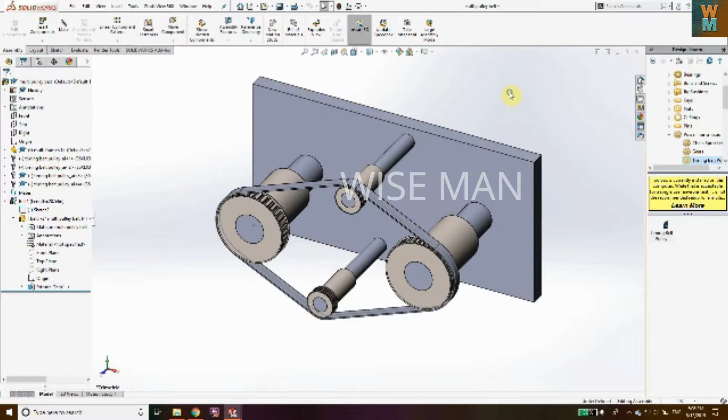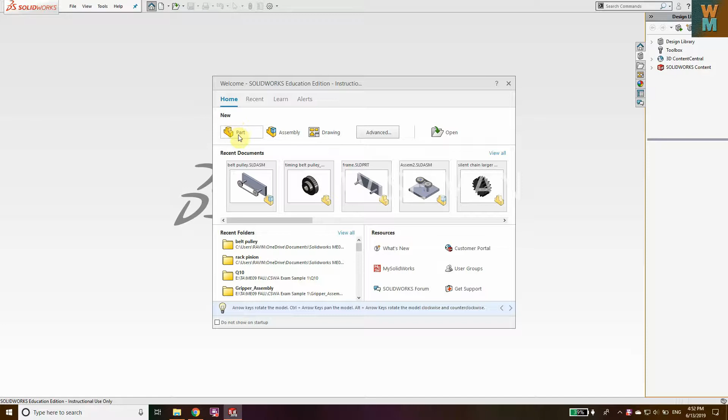So in this tutorial of Solidworks, we are going to see how you can make multiple pulley systems. So let's start. First of all, we need to make the frame on which we are going to add the pulley and the belt. So let's start by clicking part to make the part file for this.

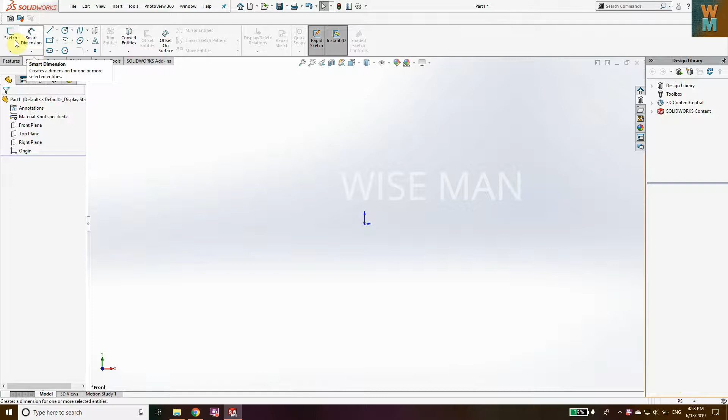So we are going to make a frame. Go to sketch and select the front plane, change the units to inch pound second IPS. Now go to sketch, select the front plane and make the frame. Go to smart dimension, give the dimension.

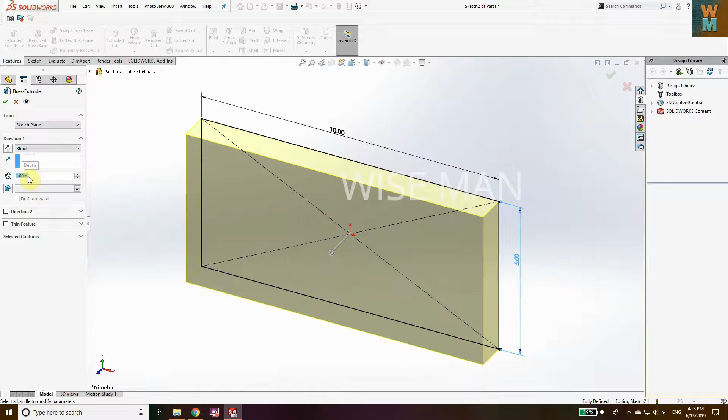So let's say this is 10 units and this is 5 units. So the dimension has been given. Go to features, extrude this, give 1 unit, or let's say 0.5.

Okay, so now click on this front face, right click this. If I right click, I will get all these options. Go to normal view and then again right click this and go to edit feature. Now sorry, go to sketch, so right click this and go to sketch. So I will show you again. So select this face, right click this and click on sketch.

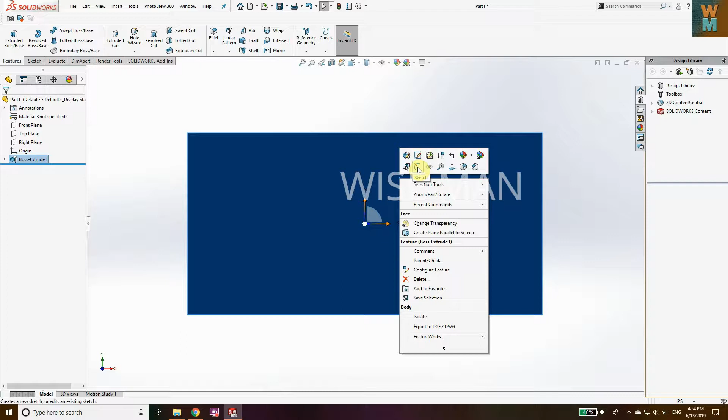So now select this circle and let's make one circle over here, one over here, then one like this. And now give the dimension.

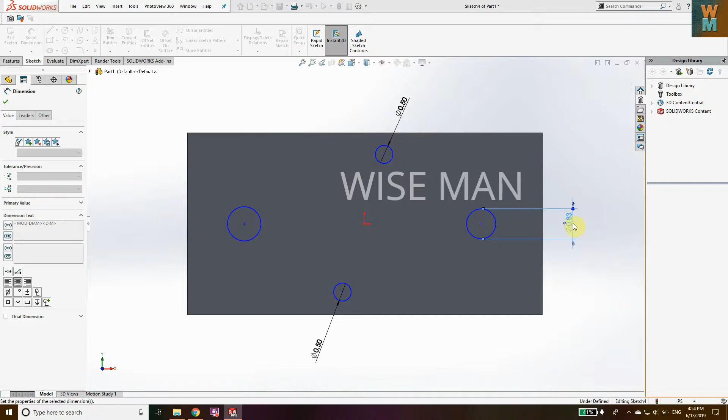So let's say this has the diameter of 0.5, this has diameter of 0.5, this has diameter of 1, this has diameter of 1. That's the diameter. Now give the distances from the origin.

So let's say this is 0.5, and from this to this it's 0.5. Same for this, from center to center distance is 0.5 units, from this to the bottom edge 0.5.

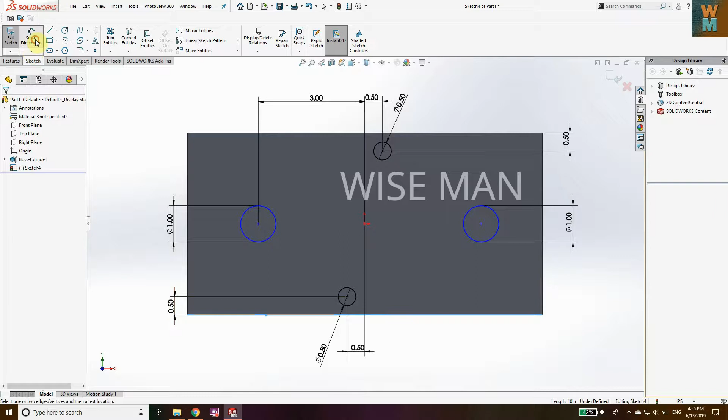And now for the bigger circle, select the center of that circle and the origin and give the distance of 3 units from the center. Then select the center of the circle and this, click on the smart dimension, this and this, give 2.5. Same for this circle, let's make it 4, and from this to this 2.5.

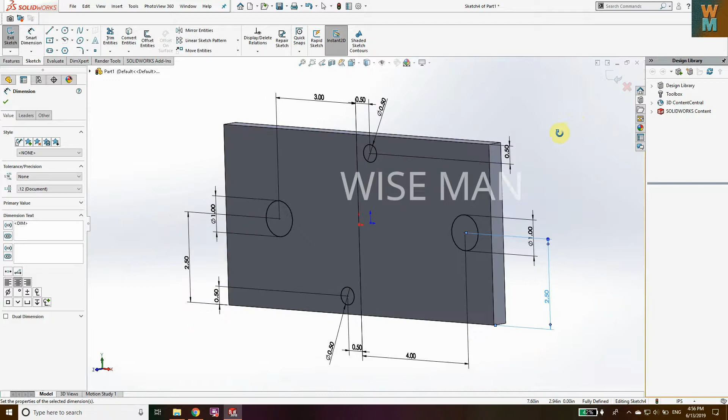So now we have defined the dimensions for all this. I think let's make it 3 for the symmetry thing. Okay, so now this has been defined.

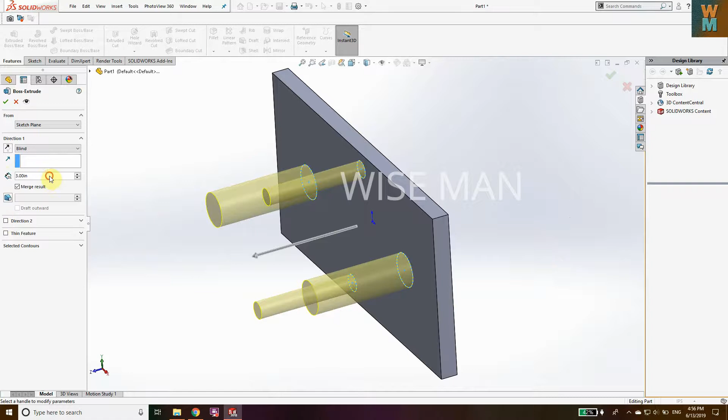Now go to extrude base, so it's able to extrude all these circles, and let's say we are extruding these 3 units. Yeah, or let's make it 4. Okay, so now you can see that we have this frame on which we are going to put the pulley.

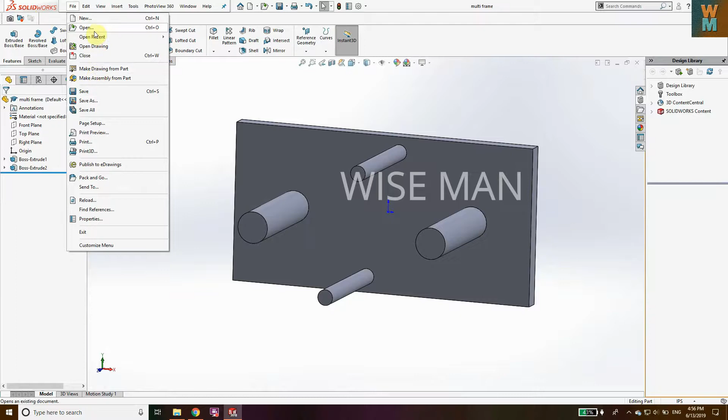Okay, so now save this, and let's save this as multi frame. And now go to file, go to new, assembly, and you select this and just click this tick right button. Okay, so now we have this frame.

And now we need to add the pulley and the belt. So go to this design library, go to toolbox, click on add in now because it's not added.

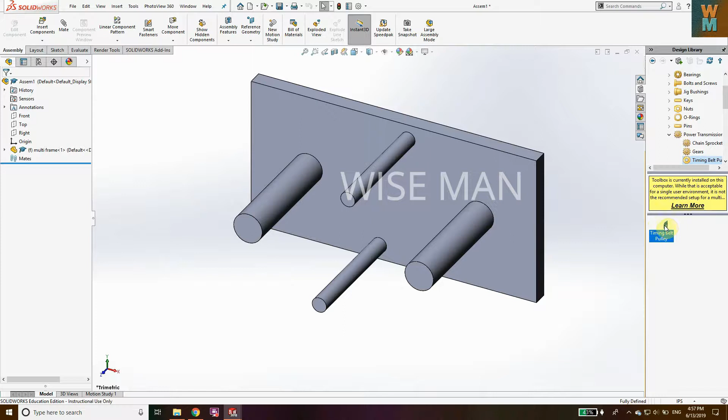Okay, so now first of all change the unit to inch pound second IPS, then here go to ANSI Inch, then go to power transmission, go to timing belt pulleys, select this, hold this and drag it over here. So that's the one, it's extra large.

Okay, change the properties from here. So extra large, belt width, flange, number of grooves 20, hub diameter is 1, so this has diameter 1, overall length 2. Okay, nominal shaft diameter is 1.

Okay, click on this, so again I got this error. For this, what you have to do: right click on this, go to the toolbox component, and here change the diameter to 3. So you can see that it is not visible. Change the overall length to 5.

Right click this, go to edit toolbox component. Okay, number of grooves, let's make it 44. Yeah, so now that's the thing. So let's make it 36.

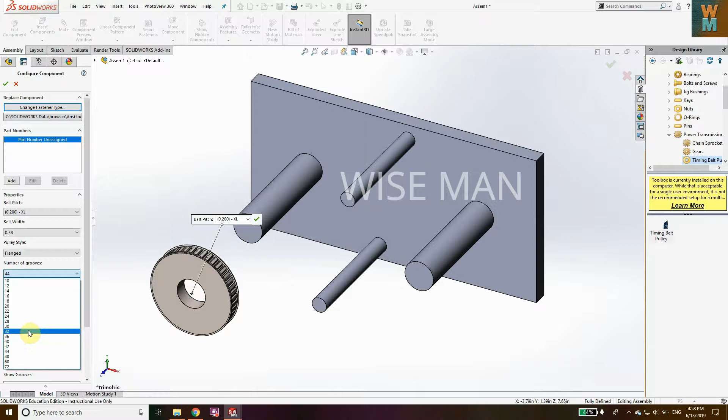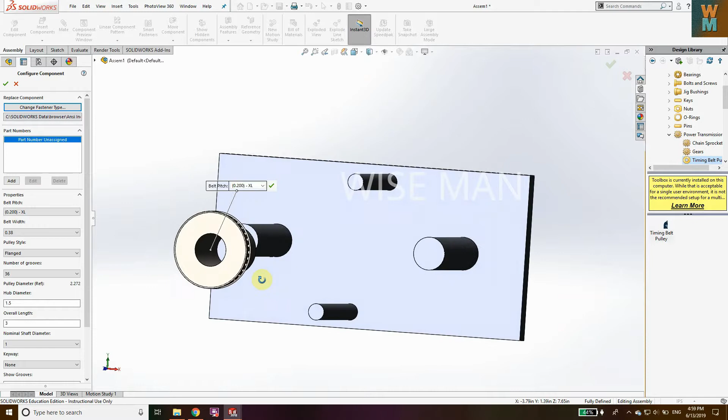Okay, that's fine. And now let's change this to 3, and hub diameter 3, or 1 - yeah, 1.5. Okay, yeah, so now we got this thing 1.5 like this. So now we will not get any error.

And so if I rotate this, I can see that I can drag this. Okay, and I want to mate this with this. Also I want a copy of this pulley. So select the pulley, hold the control key on your keyboard, and you have to click the left mouse button and drag this to make a copy.

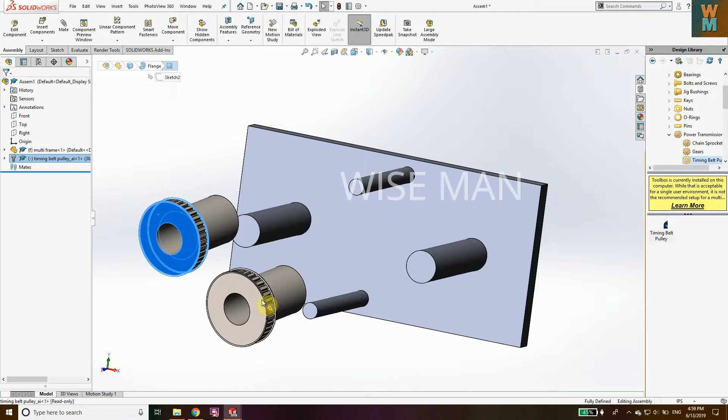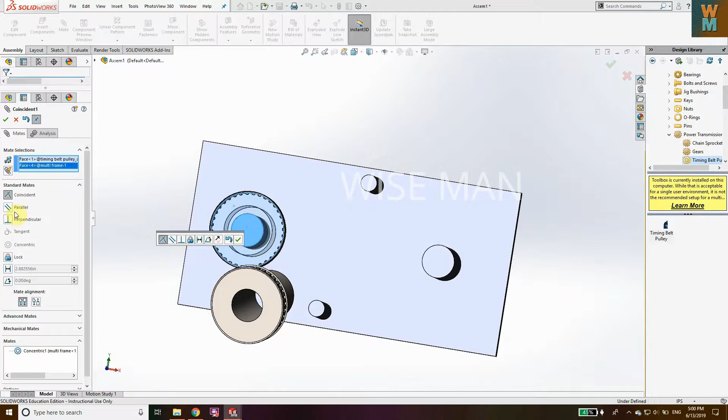Okay, so now let's mate this. Click on the mate option, delete this, select the inner surface and the outer surface of this shaft, make it concentric. Then select this top face and the face of the shaft and make it coincident like this.

Same you will do for this. Select the inner cylindrical area and then this, make it concentric. The top surface of the shaft, make it coincident. So now this has been done pretty well.

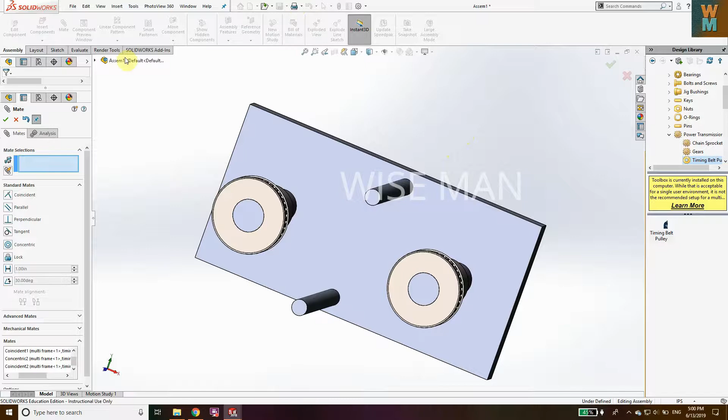Now for these two shafts having smaller diameter, we also need two more pulleys. So let's drag this again and make it XL. Large is going to be very large, make it MXL. Number of grooves, make it 22.

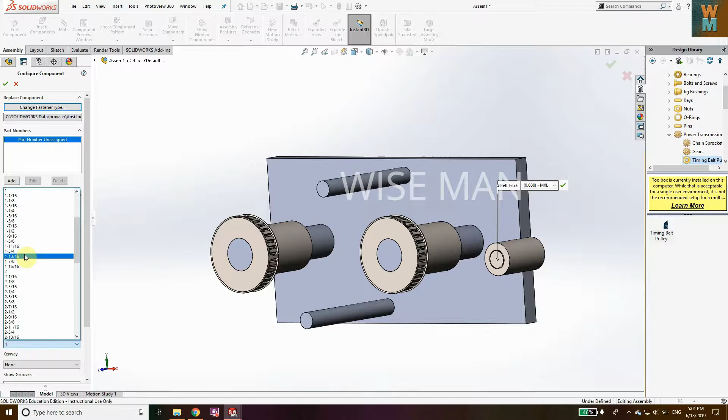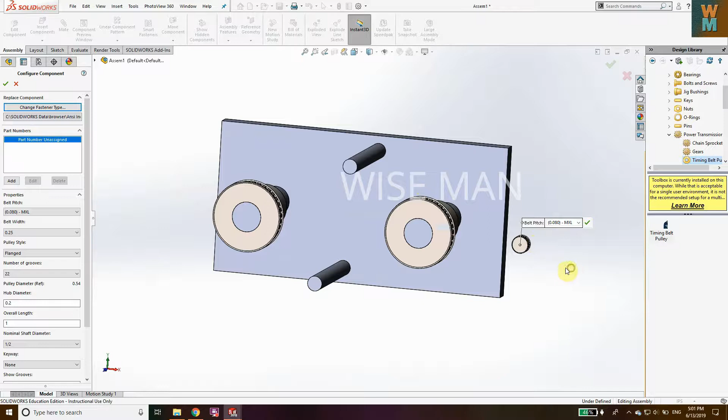Here you have to change the width to 0.25. Nominal shaft diameter is going to be half, 1/2, like this. Then we have to change hub diameter to 0.2. As you can see, overall length, make it 1. Hub diameter, let's change to 1. No, 1 is not visible, so 0.5. Pulley diameter reference 0.54.

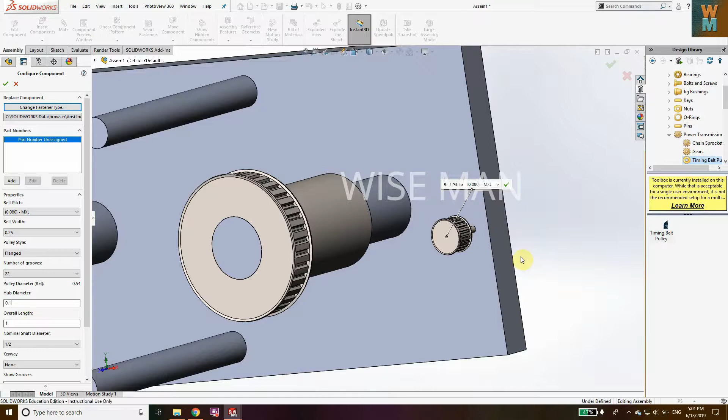Okay, so now that will work. 0.5 for this. Let's see, because I got this error again.

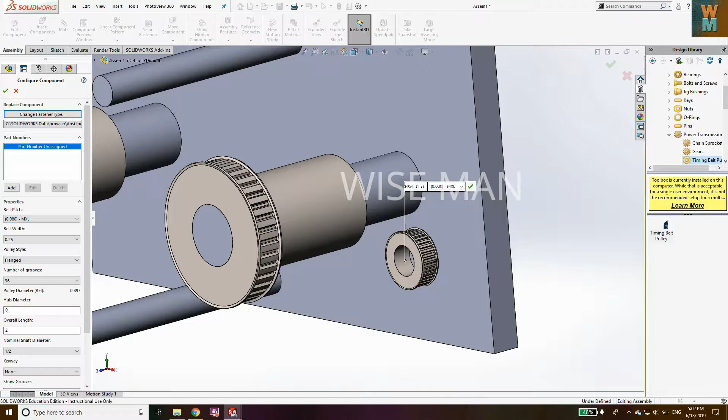So again I have to click on this, go to edit toolbox component, and let's make it 36 over here for diameter. 1 will not work, 0.5, no, 0.7, okay yeah so 0.7 will work.

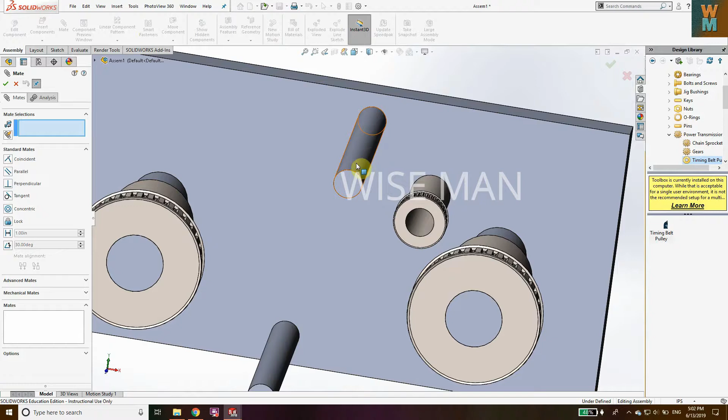Okay, and then click on this. Now drag this, and we want to make the mate for this, so let's place it over here so you can see. Then go to mate option, select the inner surface, make it concentric, and this face and this face make it coincident. So you can see that has been done pretty well.

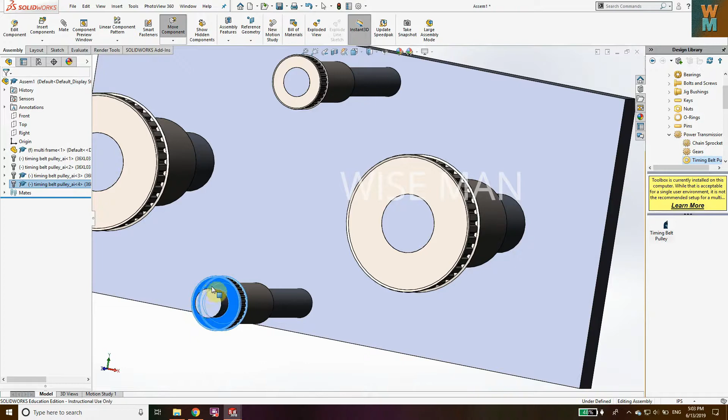Now I want a copy of this, so I will first select this pulley, hold the control key on the keyboard and drag this. Okay, it's done. I also want a mate for this, so click this, and it's coincident.

So now if I rotate this, I can rotate all of these individually. But now I want a belt, because the belt will rotate all of these pulleys simultaneously. So how to insert the belt?

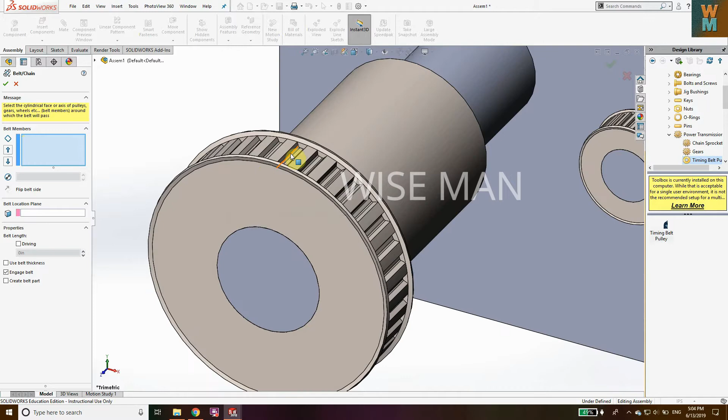So for that, go to insert, then go to assembly feature, belt chain, and now we have to select the top faces of each of these pulleys. So 1, 2, you can see it has been added, but I also want this one. Now you can see it is coming from this thing. We also have this pulley. Now you can see we have made the whole belt like this.

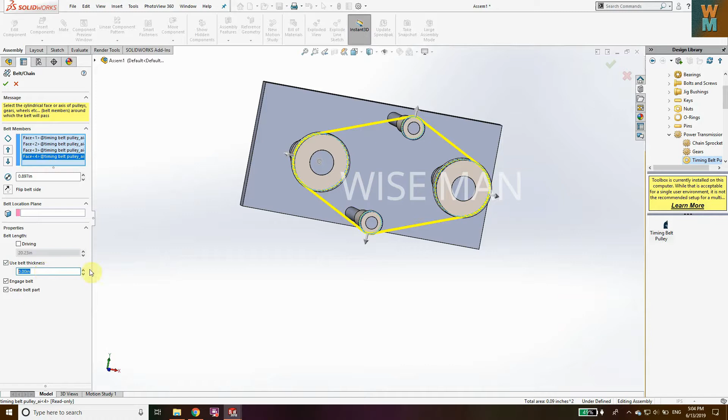Create belt part, use belt thickness, and let's say the thickness is 0.2. You can see that this is the thickness, so let's make it 0.1, and then click on this, save and continue.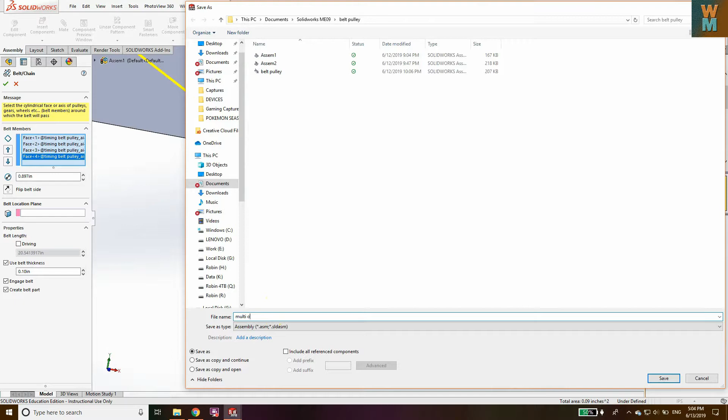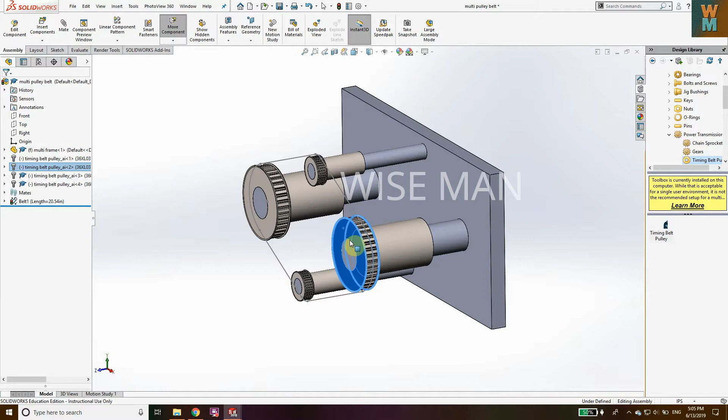Multi pulley belt. Okay, so now we have saved this. If you rotate one of the belts, all the pulleys will rotate. Like if you rotate one of the pulleys, all the pulleys will rotate. So that's the function of the belt.

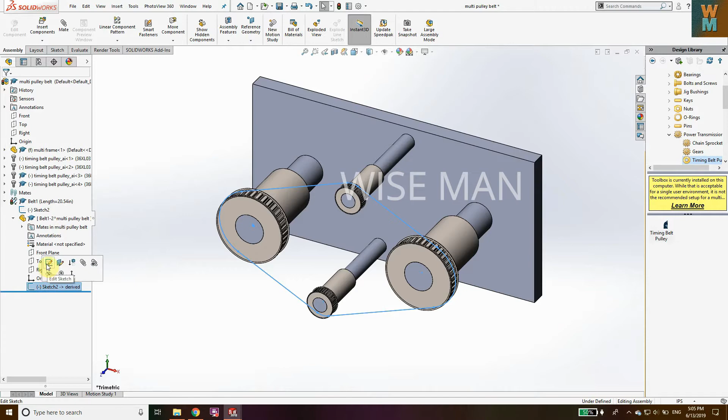Okay, so now go over here in this feature manager design tree, click on this arrow in the belt, then go to sketch, click on this, go to edit sketch. Now if you go to edit sketch, go to extrude boss and base. You can see we are getting this thing, like it's extruding all over here. We don't want this.

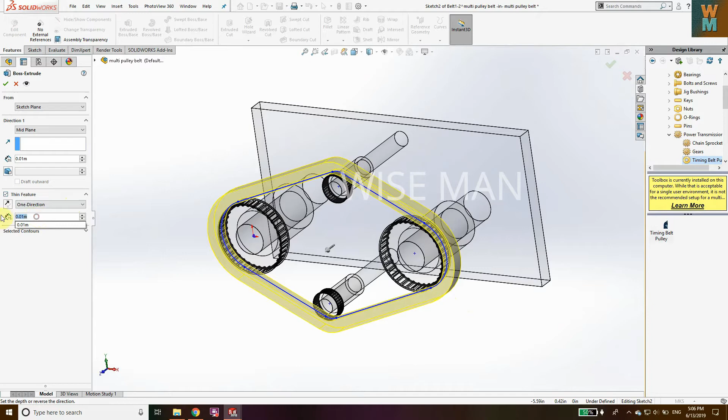Go to thin feature. So now you can see we are extruding the belt only, and give the thickness as 0.01. You have to give the thickness as per your wish. Make it 0.0005.

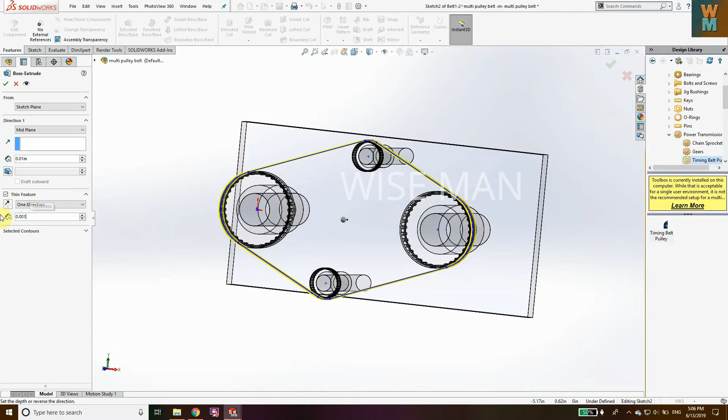Okay, so I think now this looks pretty good. Or 0.001. Okay, and then click on this. So now we got this belt. Click on this, and now you have this belt on the pulleys, the multiple pulleys. So now if I rotate, you can see that all of the pulleys are rotating in the same direction.

So in this way you can create the multiple pulley system in SolidWorks.